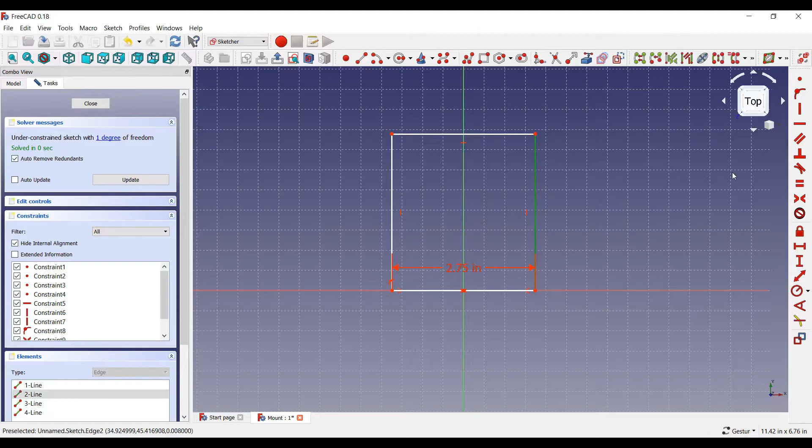First, I'll create a new project. Then I'll save it under the name Mount. Then I'll choose Part Design from the drop-down and I'll create a body and a sketch. I'll put the sketch in the XY plane. Now, I want to create a rectangle that is 2 3/4 inches by 2 1/4 inch. Then I'll pad it 3/8 of an inch up and 1/4 inch down.

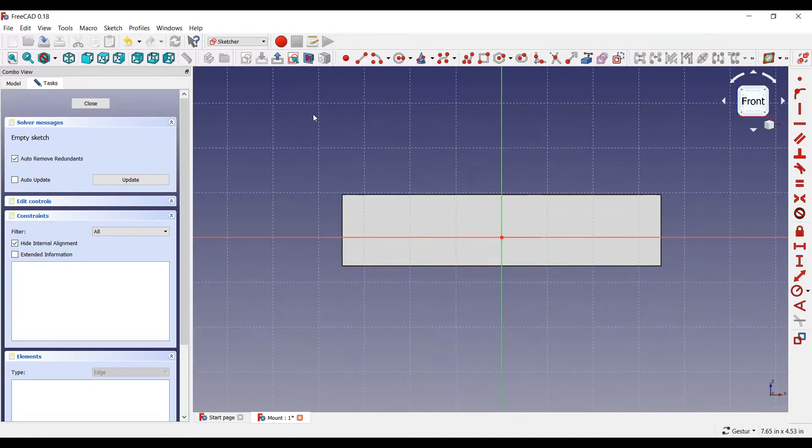Perfect. Now let's create another sketch on this face. I'm going to draw the shape of the slot for the mounting adapter to fit in. I'll give it a height of 3/8 of an inch. I'll make the two short sides equal and set them to 0.07 inches. Then I'll make the lower and upper lines symmetric about the y-axis.

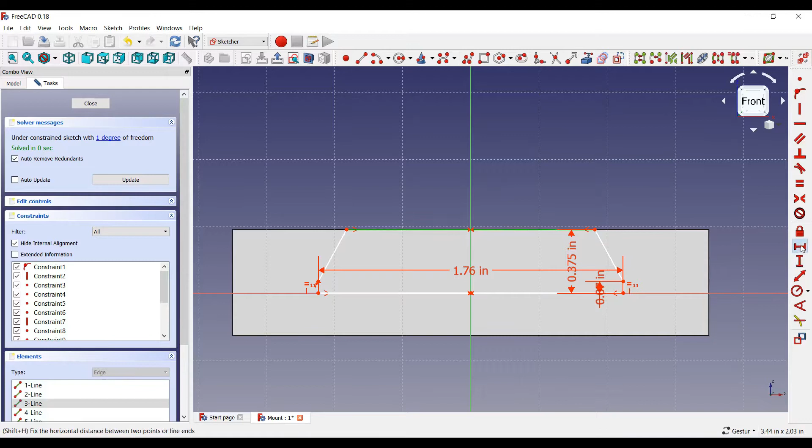I'll give the lower line a length of 1.76 inches and the upper line a length of 1.4375 inches. Notice how it turned green. That means we are fully constrained. Now, let's create a pocket and set it to Through All. Perfect. Now the mounting adapter can slide into this.

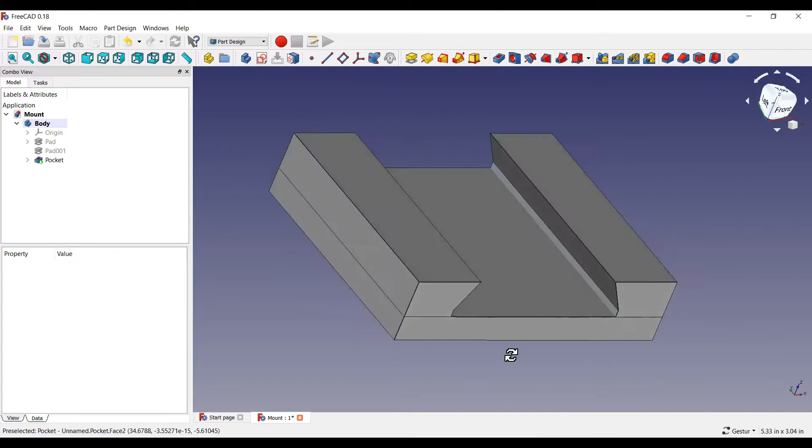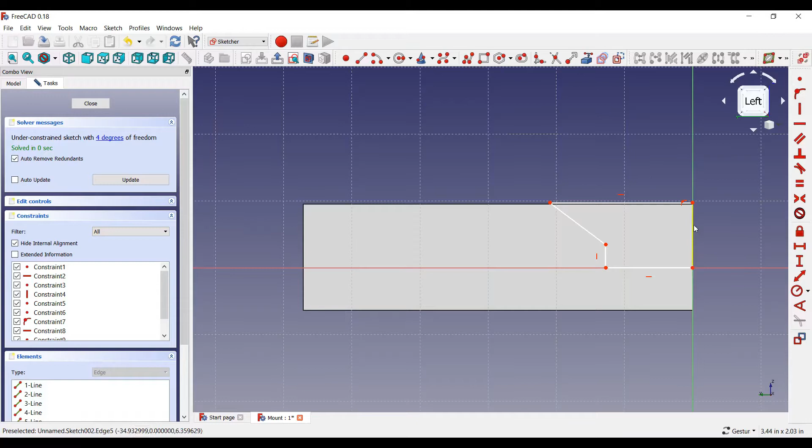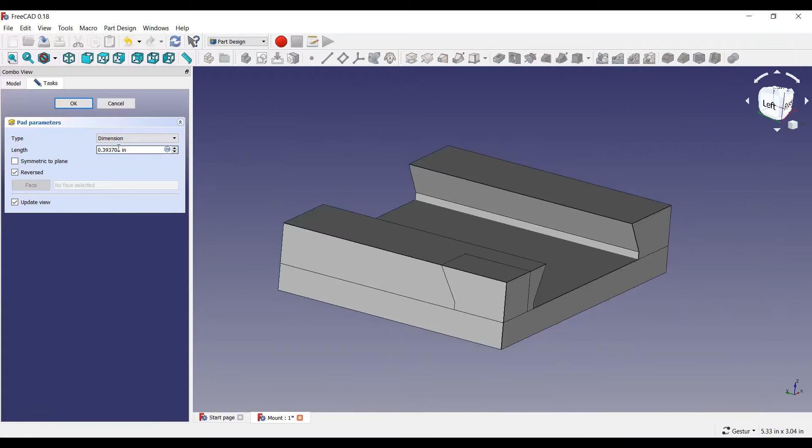Now we need to make the bottom. So I'll create another sketch on this face. Now I'll draw the bottom profile. I'll give it a height of 3/8 of an inch and make the small line 0.07 inches. The bottom line will be 0.495 inches and the top line 0.65625 inches. Now I'll pad this in reverse all the way across 2.75 inches. Excellent. Look at how we have a perfect slot for the mounting adapter to fit into.

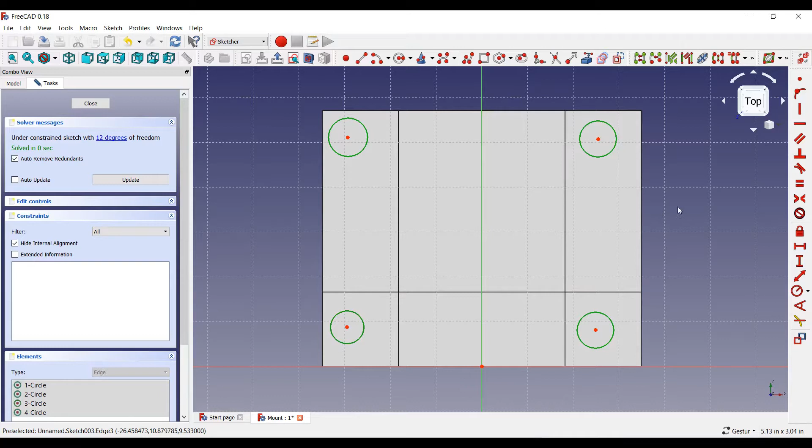Now let's create some mounting holes. First, I'll create a sketch on the top face and I'll add 4 circles. I want to make them all equal in size and set the diameters to 0.15625 inches. I'll make the left and right circles symmetric about the y-axis. Then I'll set the distance between the left and right circles to 2.1875 inches.

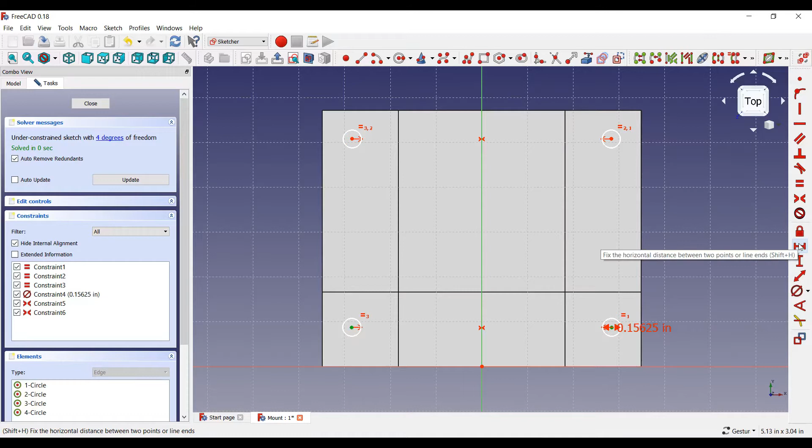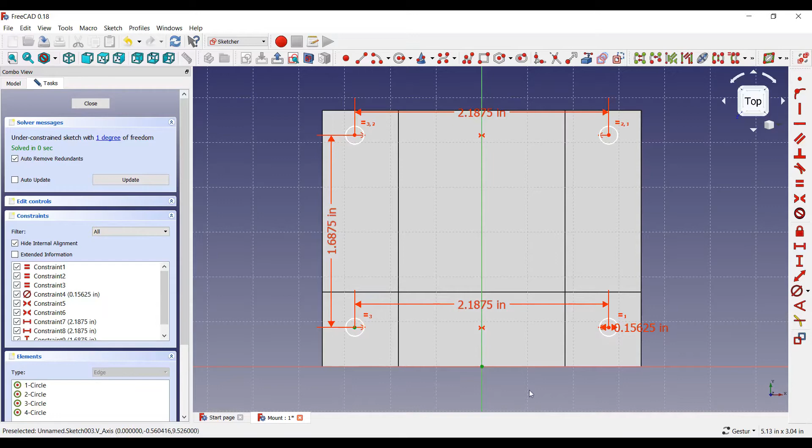Now I'll make the upper and bottom circles 1.6875 inches apart from each other. Finally, I'll place the bottom circles 0.28125 inches above the x-axis. Now we are fully constrained. Let's pocket these holes all the way through. Now I'll make 4 more circles and place them at the same locations as the previous circles, but I want these to have a diameter of 0.3 inches.

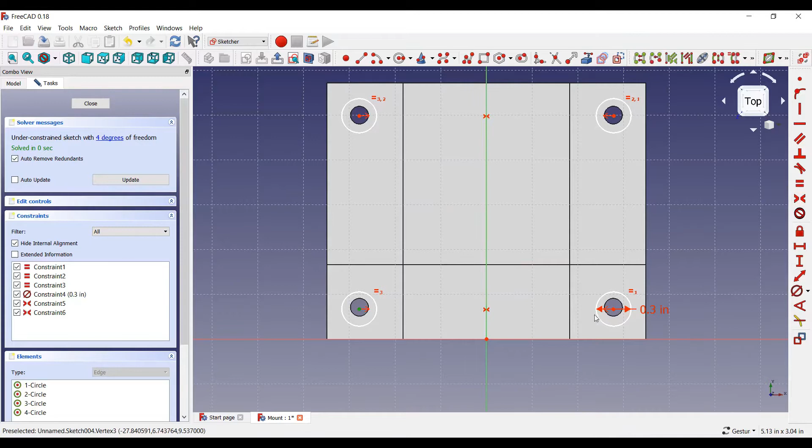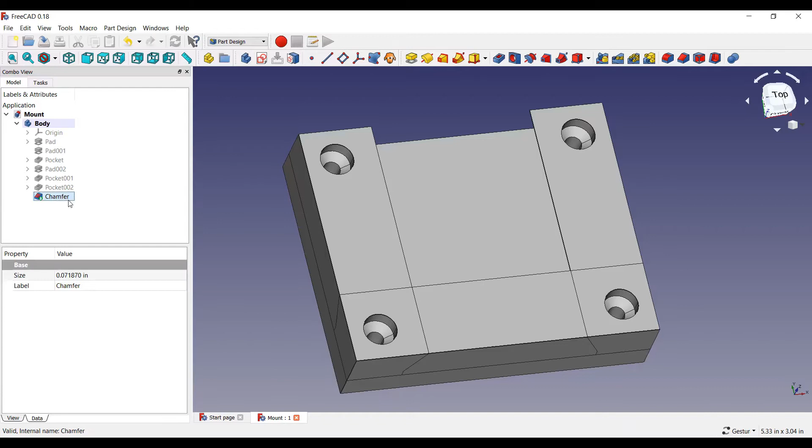Now I'll pocket these to 1/8 of an inch. I'll select all the small holes and create a chamfer. I'll set the chamfer to 0.07187 inches. Beautiful! Let's save the project. Now, we just need to export this to an STL file before slicing it for the 3D printer.

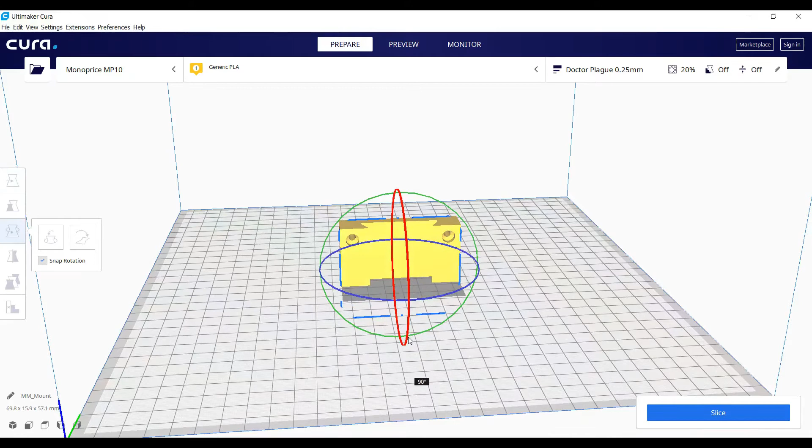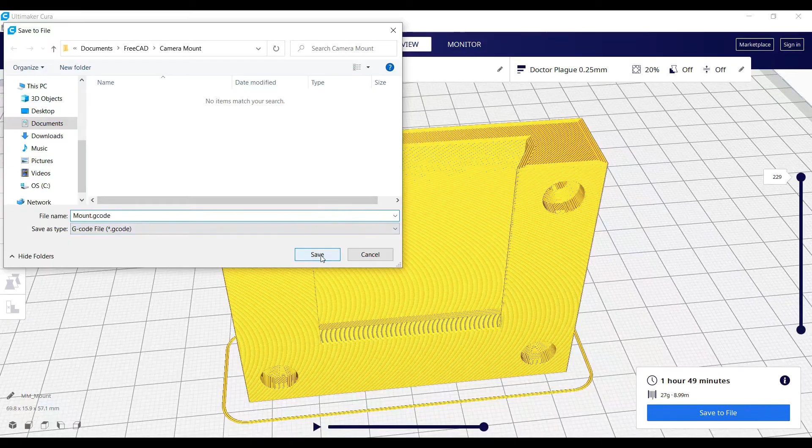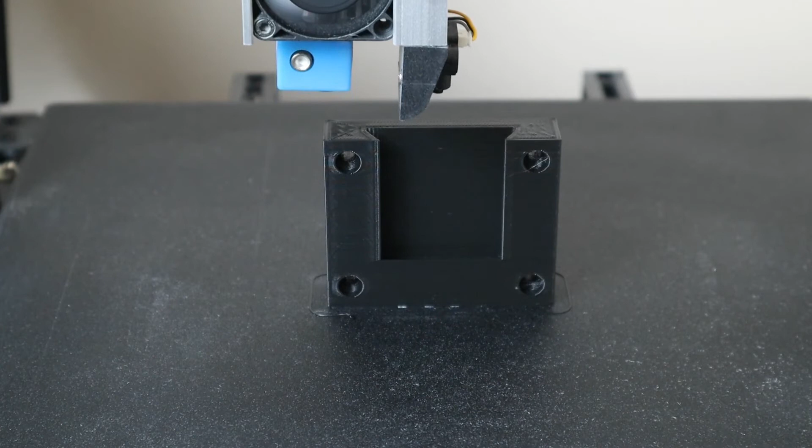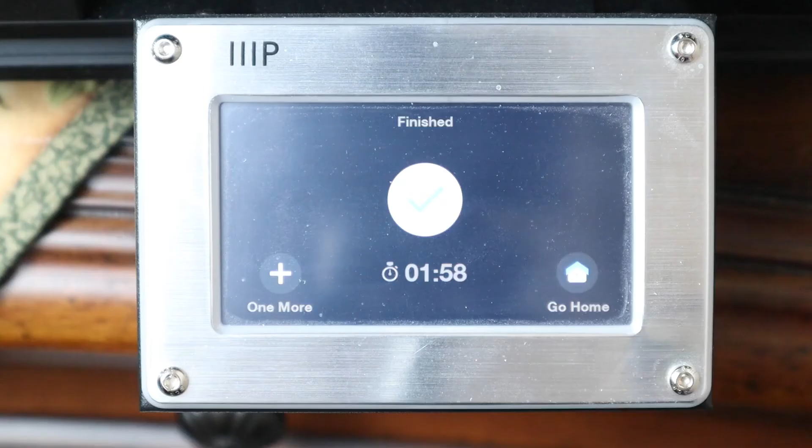I'll open the STL file in Cura and rotate it up 90 degrees. This will give it more strength, so the layers don't pull away due to the weight of the camera. I'll slice it and we'll give it a quick preview. Excellent. Let's save this and bring it to the printer. Fits perfectly.

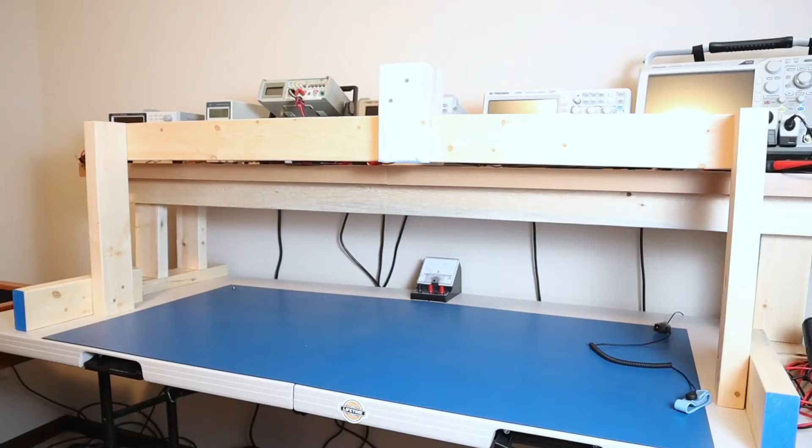I created this support beam by just screwing some 2x4s together. I screwed these pieces together so it can slide across the beam to position the camera at different locations. Now, I'll just screw the mount right here. And there we have a custom camera mount. And I have all this room to work under it. I may switch this out to a dowel rod system in the future, but this is the wood I had on hand.

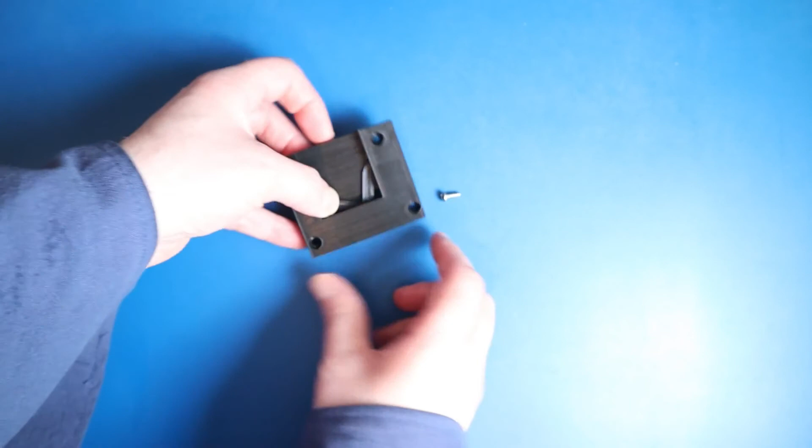Now, I did make this version of a mount first, which has a little mechanism that screws into it that stops the camera from sliding or rocking left or right. When the mounting adapter slides in, it will rotate this lever and apply pressure to this side of the adapter to hold it tightly in place. But after making this, I realized that the weight of the camera is really enough to keep the camera still, so I abandoned this version.

But it just shows you that with a little creativity, you can design and 3D print almost anything you can think of. Also, I printed a small section of the mount upside down so I could test fit it before wasting a lot of filament to print the whole mount. I did find that my first attempt needed a small adjustment since it was too tight.